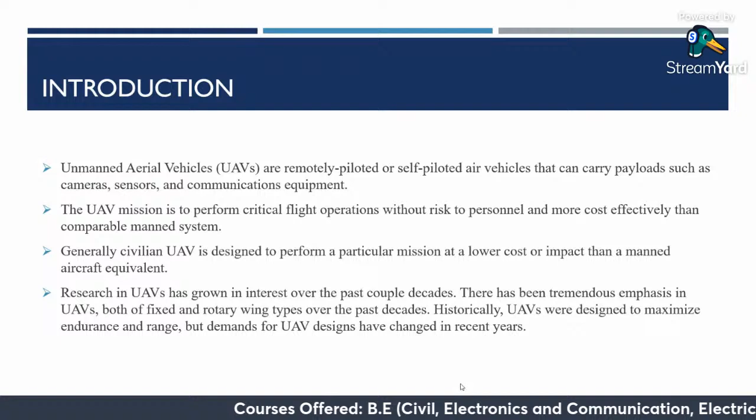Moving on, generally civilian UAVs are designed to perform a particular mission at a lower cost and provide higher impact compared to manned aircraft. In the recent past, trends show that research in UAVs has grown a lot, especially in the past couple of decades. Moreover, both fixed wing and rotary type UAVs have seen drastic improvements compared to the last 30-40 years.

Moving next, let us first get an idea about different types of unmanned aerial vehicles. In the top left corner we have the fixed wing UAVs, and next to it we have different types of multicopters.

Multicopters have different rotor crafts to help you fly in air, hover, or perform different maneuvers. Multicopters are classified into bicopters, tricopters, quad, hexa, and octocopter.

When we combine both fixed wing and multicopter, we get a hybrid VTOL UAV. Multicopters aid us by providing vertical takeoff and landing abilities, whereas fixed wing UAVs are well known for higher range and endurance. Endurance is, in simple terms, the amount of time which we can fly. Whereas in multicopters, the amount of flight time is very less.

But the disadvantage with fixed wing UAVs is that we either need to hand launch it, or it needs a runway to take off from the base or ground station. So when we combine multicopters and fixed wing UAVs, we get hybrid VTOL UAVs - the combination of multicopters and fixed wing, which offers vertical takeoff and landing. Once we take off, we switch to fixed wing mode, where the propulsion system for fixed wing turns on, and we can extrapolate huge endurance and range compared to multicopters.

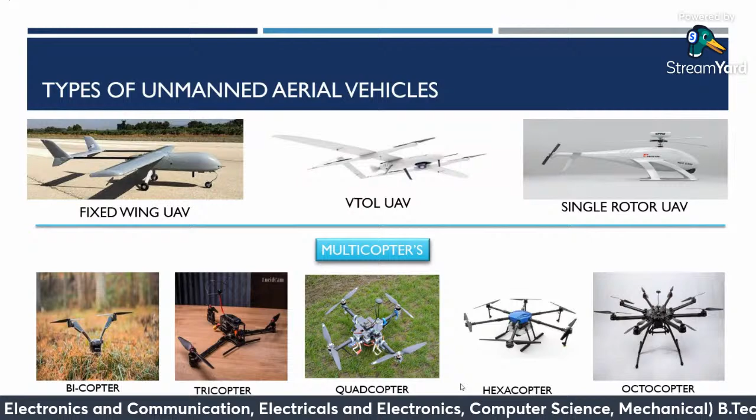Moving up next, let's learn deep about the fixed wing UAVs. Fixed wing UAVs can be used for flying as a hobbyist, or in various other applications. For example, here the UAV presented is the Skywalker UAV, which is hand launched. Generally, fixed wing UAVs use the wings to generate lift, and the geometry is designed with airfoils in an aerodynamic way that satisfies our needs.

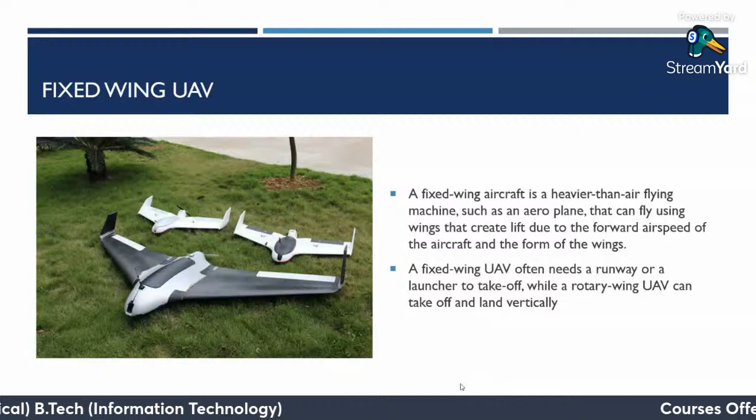About airfoils and the basics of flight physics, we'll be covering that in upcoming sessions. Next is the hybrid VTOL. As mentioned earlier, this category includes a wide range of aircraft, including helicopters, thrust vectoring fixed wing aircraft, and hybrid aircraft with powered rotors.

The major advantage, as I mentioned earlier - here we have a hybrid VTOL presented on the left side of the slide. You can see it is the H configuration with a propulsion motor at the rear part of the aircraft. Using the four motors present in the H configuration, we can take off. Once we reach a certain altitude, we transition to forward flight, where all four motors turn off and we can cruise efficiently towards our mission requirements.

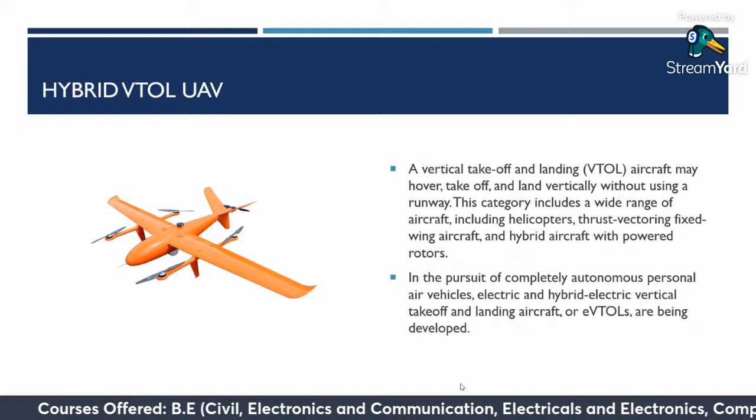As mentioned earlier, there have been huge developments in this particular range of UAVs. The extent of development is such that in very few years, we'll be able to use air ambulances or air taxis, which are already applicable in certain countries.

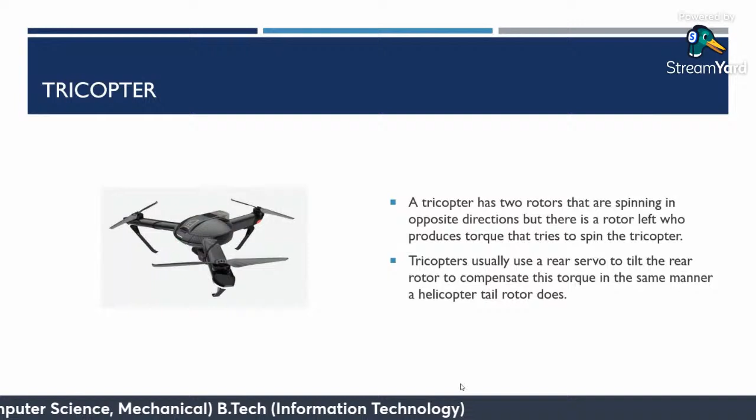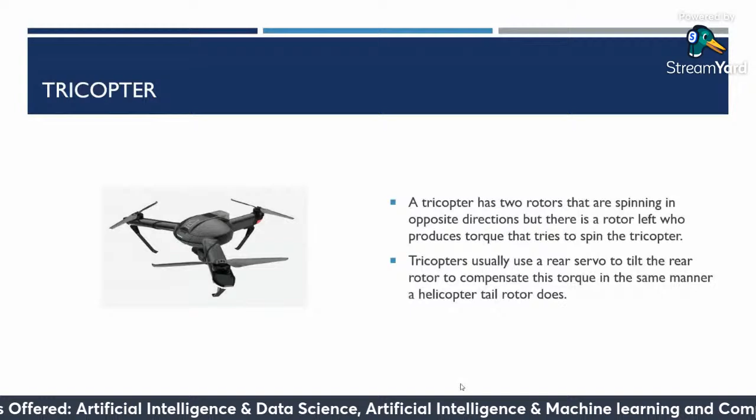Next, a tricopter. Generally, a tricopter consists of three motors - tri meaning three. To maneuver efficiently, it uses a servo in the rear rotor to compensate for torque, similar to helicopters. Even helicopters have a rotor in the rear part just to counter the torque created.

And then here comes the quadcopter, which you would have come across very frequently, and it is very good for hobbies to start off with. A quadcopter, sometimes known as a quadrotor, is a four-rotor aircraft. Despite the fact that quadrotor helicopters and convertiplanes had long been flown experimentally, the arrangement remained a mystery until the emergence of the contemporary UAV or drone.

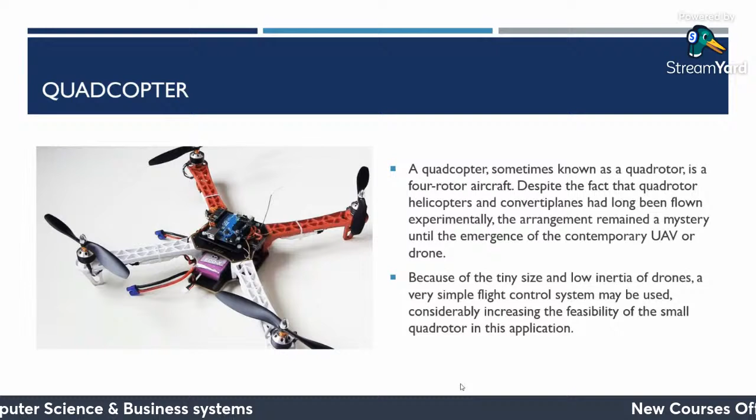In recent days, being practical, we have seen so many people getting into this field, not just as professionals, but with eagerness to learn about these things. It is a very good atmosphere being created. And because of the tiny size and low inertia of drones, a very simple flight control system may be used. As you can see in the picture, you can get an Arduino board, and also get a ready flight control program available on GitHub.

Just plug into the Arduino board, dump the code, and get the hardware system ready. You yourself can assemble a quad rotor drone and understand the dynamics, and also learn flying.

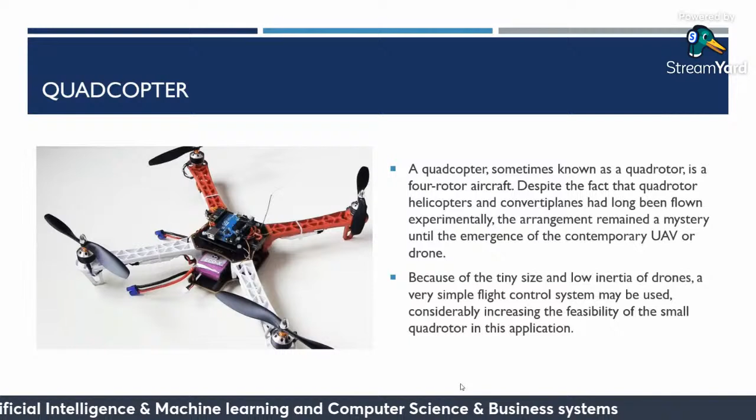Up next is the hexacopter. As the prefix mentions, it has 6 rotors. How are hexacopters different from quadcopters? They are strong, lightweight aircraft that can carry larger payloads compared to quadcopters because they're very steady in the air, making them ideal for aerial photography.

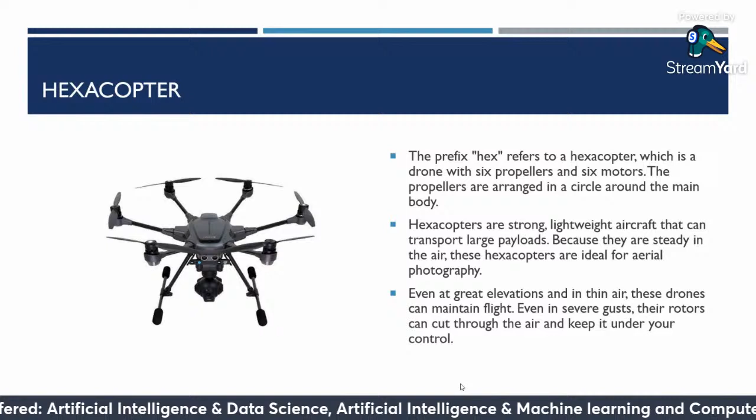There are many drones available in the market like DJI and Parrot drones, all using quad rotors. But one advantage of the hexacopter is that even if one motor fails, we could still get the system safely to land. Whereas if a motor fails in a quadcopter, it's a big hassle to bring the system back to land safely, and it might be catastrophic, causing us to lose a large amount of invested money.

Moving next, we have octocopters. Octocopters are basically UAVs that can fly in multiple directions simultaneously.

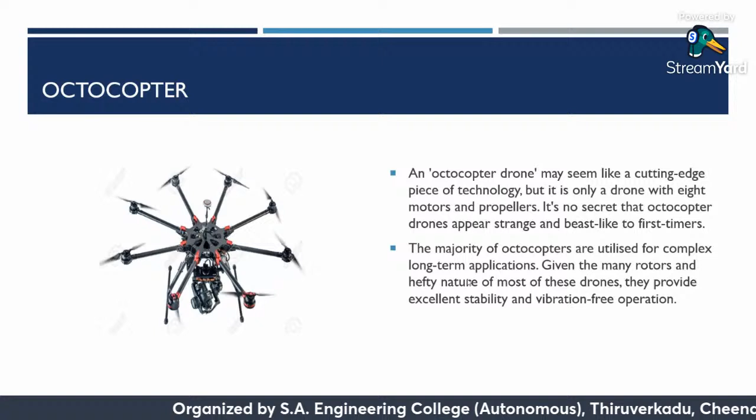Up next, we'll go through the classification of unmanned aerial vehicles based on UAV class, weight, and size. Adding to it, we'll also learn about operating altitude, range, and endurance.

First in the list is the micro class UAVs. The weight is nearly less than 0.55 lbs. Speaking about size, it's less than 10 centimeters, and their operating altitude is relatively low. Range is around 0.1 to 0.5 kilometers, which is like 100 to 500 meters. Speaking about endurance, it's much less than an hour, because the battery technology available till date is not sufficient to satisfy our needs for longer endurance.

Up next is Mini, which is around 0.55 to 2 lbs. Their size usually varies from 10 to 30 centimeters, and the operating altitude is less than 500 feet. Range is from 500 to 1000 meters, which is 0.5 to 1 kilometer, and their endurance is also restricted to less than an hour.

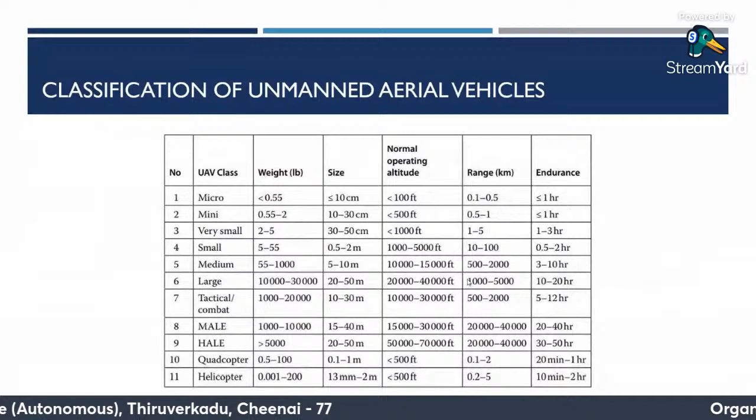Moving next is very small or nano UAVs. Their weight is generally limited to 2 to 5 lbs, and their size is around 30 to 50 centimeters. Their normal operating altitude is less than 1000 feet. Range usually extends from 1 to 5 kilometers, and compared to micro and mini UAVs, their endurance is a bit higher, ranging from 1 to 3 hours.

I'd like to share some information here: the DJI Mavic Mini comes under the class which weighs under 250 grams, so we don't need any registration from our side to the government. The reason is that this weight categorization is done for lawmakers to ensure and track the number of drones being operated in our country, as they may also be a threat to defense forces or civilians living nearby.

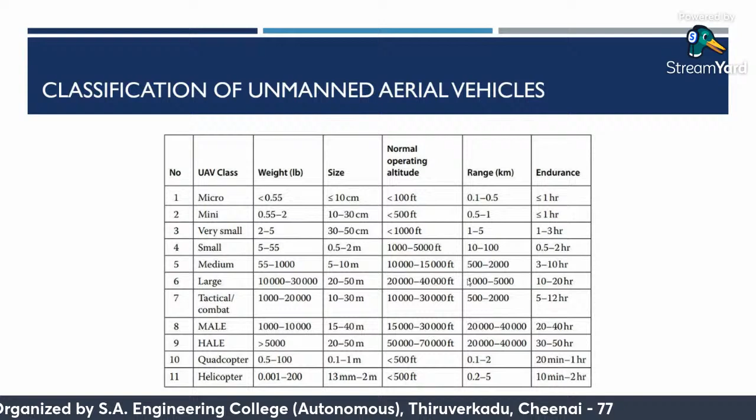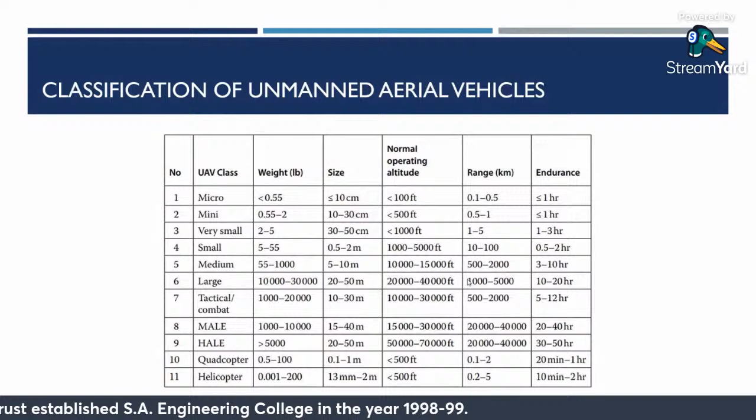Up next is the medium class UAVs. The weight generally ranges from 55 to 1000 lbs, and the size is from 5 to 10 meters. Speaking about operating altitude, it varies from 10,000 to 15,000 feet. And here comes a big difference compared to other classes of drones: their range is very high, from 500 to 2000 kilometers. The endurance is based upon the propulsion system used. With electrical propulsion, their endurance sometimes gets cut off significantly, whereas with IC-propelled or other propulsion systems, we can achieve high endurance, around 3 to 10 hours.

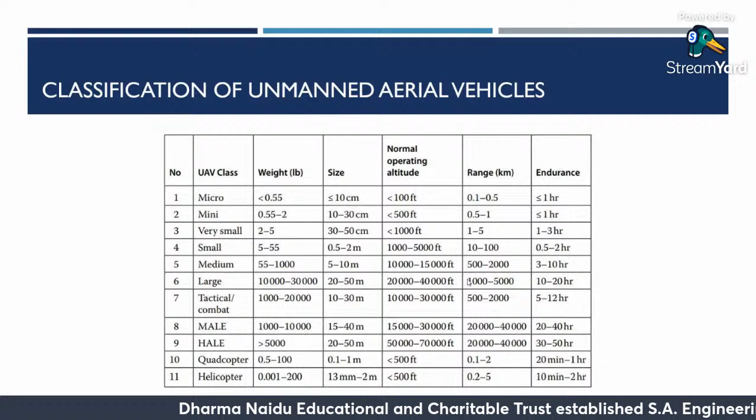Up next is the large class of UAVs, with a weight limit from 10,000 to 30,000 lbs, and size from 20 to 50 meters, as it sounds very huge. Their operating altitude is 20,000 to 40,000 feet, and the range varies from 1,000 to 5,000 kilometers. Speaking about endurance, these UAVs can be very useful in missions where we need to attack an opposition that's 2000 or 3000 kilometers away. To put it simply, in a war between two countries, they'll be using large scale or MALE class UAVs. We'll look into MALE class in the following slides.

And up next is tactical or combat. As I mentioned earlier, recently DRDO has tested a Swift UAV. It's nothing but a tactical or combat unmanned aerial vehicle. The job currently done by the pilot in a fighter aircraft will autonomously be carried out by the tactical or combat UAV with the help of a manned fighter jet.

Up next is MALE, also called medium altitude long endurance UAV. The weight is from 1000 to 10,000 lbs. The size usually varies from 15 to 40 meters, and the normal operating altitude is from 15,000 to 30,000 feet, and the range is from 20,000 to 40,000 kilometers. The endurance is very high, maximum at 40 hours.

HALE is nothing but high altitude long endurance UAVs. The weight is more than 5,000 lbs, and the size is from 20 to 50 meters. Normal operating altitude is 50,000 to 70,000 feet, and the range is similar to MALE class UAVs, but the endurance is very high. A HALE class UAV manufactured by a US based company has successfully flown from the United States of America to Australia, only because of the high cutting edge technologies they have. India is also looking to procure those drones for our defense forces.

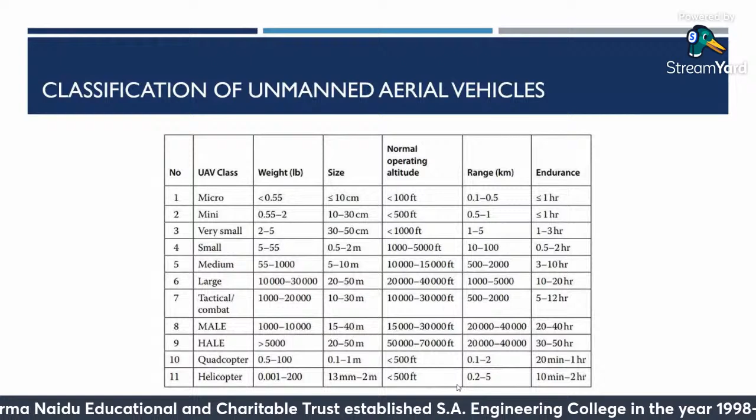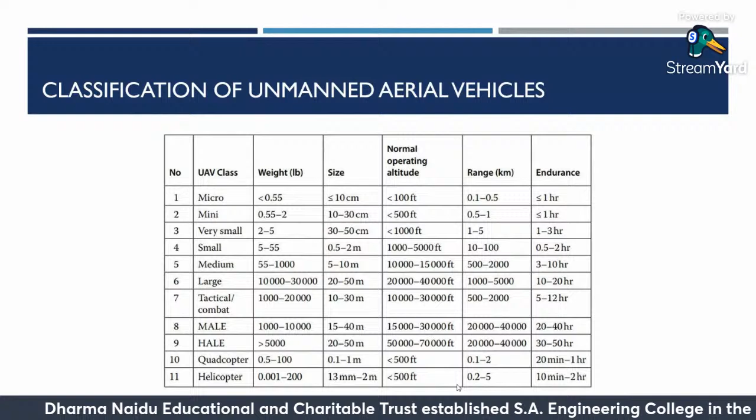Generally, their weight is at a maximum level of 200 lbs. Their size is from 1 to 2 meters, and their operating altitude is less than 500 feet. Endurance can vary, as I mentioned earlier. They're very aerodynamic and efficient compared to quadcopters, hexacopters, or octocopters, which ensures they provide an endurance of 10 minutes to 2 hours.

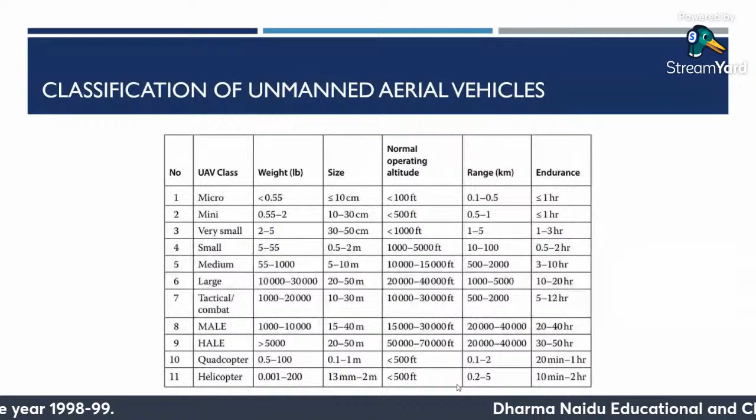Global Hawk is nothing but a high altitude, long endurance UAV. Its first flight was carried out on 28th of February 1998. The wingspan extends up to 39.9 meters—higher the wingspan, higher the lift you generate. The length of the fuselage is around 14.5 meters. Their maximum takeoff weight, as recorded, is 14,628 kg, around 14 tons. The range is up to 22,779 kilometers.

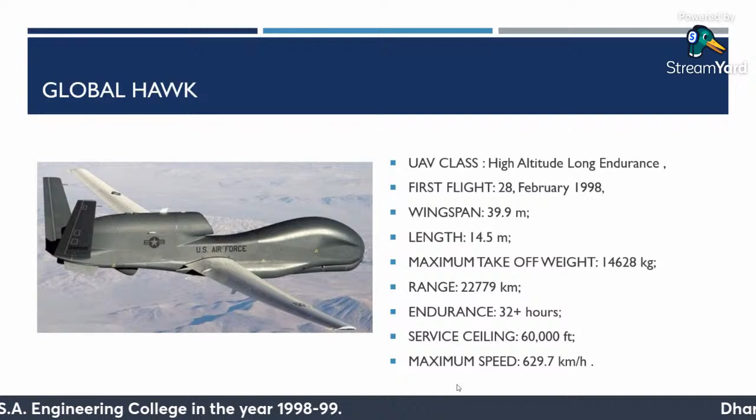As I mentioned earlier, Global Hawk is manufactured in the United States of America, which has successfully completed its flight from the US to Australia. Their endurance is more than 32 hours, and their service ceiling is 60,000 feet, and it can record a maximum speed of 630 kilometers per hour.

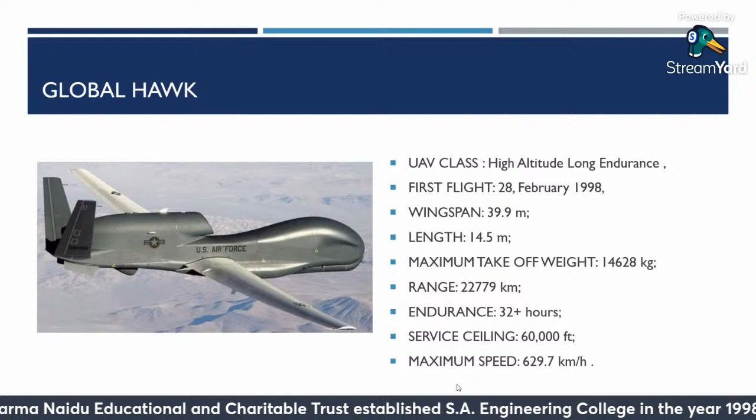Up next in our list is RQ-1A Predator. It is in our bucket list in the recent budget of our government. These UAVs belong to medium altitude, long endurance aircraft. Its first flight was carried out in June 1994. The wingspan extends up to 20 meters, and the length of fuselage is 11 meters.

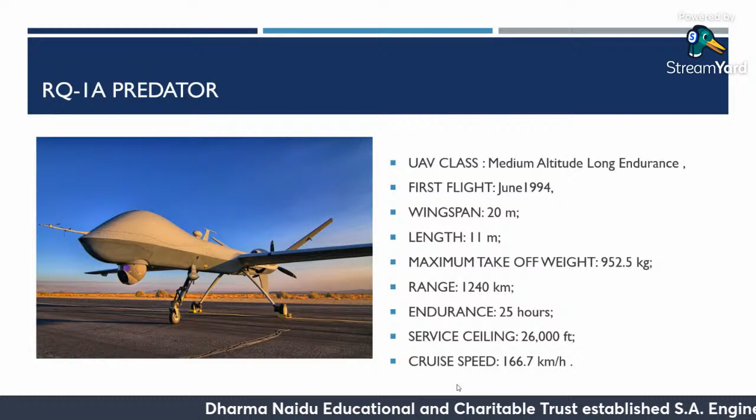MTOW is something which includes the fuel it carries, the avionics, the payload, and the structural weight itself. The maximum takeoff weight here is 952.5 kg. You could now know the difference between the HALE class maximum takeoff weight and the MALE class MTOW. The range is 1,240 kilometers. Speaking about the endurance, it's lesser than HALE class, just 25 hours. The service ceiling is also very low compared to HALE class, just 26,000 feet. The cruise speed is recorded around 166 to 170 kilometers approximately.

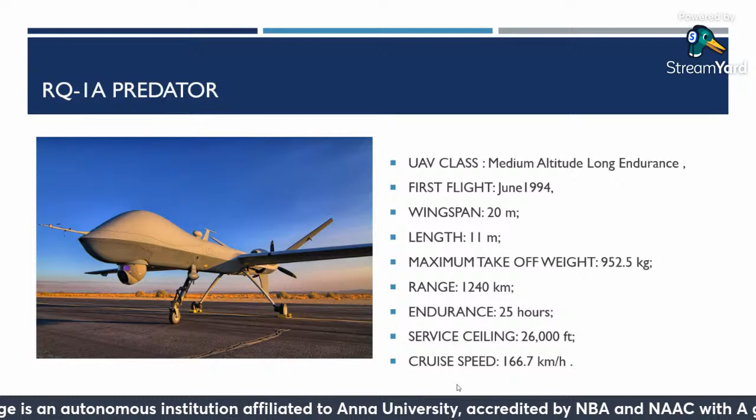Up next is small class UAV. Bayraktar is a very famous name as of now because it has been very widely used by Ukraine in the Russia-Ukraine war. Bayraktar is a small class UAV, and the wingspan is around 1.6 meters. The length of the fuselage is 1.2 meters, and the MTOW is very low, around 3.5 kg. Endurance is greater than 60 minutes as it uses an electric propulsion system and has an aerodynamic body. Service ceiling is just 300 meters and its cruise speed is recorded at 70 kilometers per hour.

Up next is Mosquito UAV.

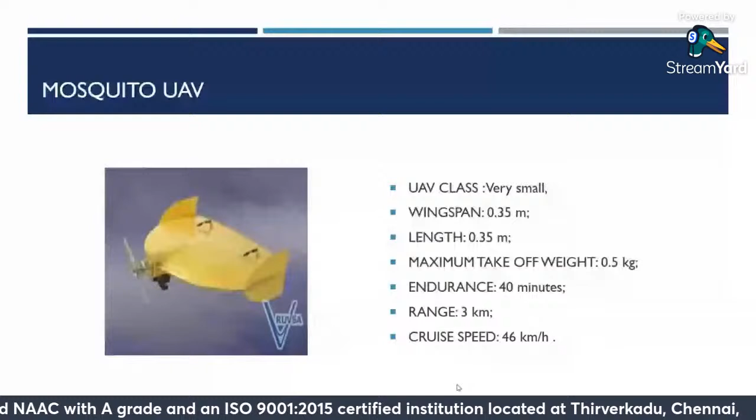The name might be very funny, but these UAVs have limited applications. This UAV belongs to a very small class, with a wingspan around 0.35 meters and length of 0.35 meters, around 350 mm. The MTOW of this UAV is 0.5 kg, and it provides an amazing endurance of 40 minutes, even though propelled by an electric propulsion system. The range is around 3 kilometers and its cruise speed is 46 kilometers per hour.

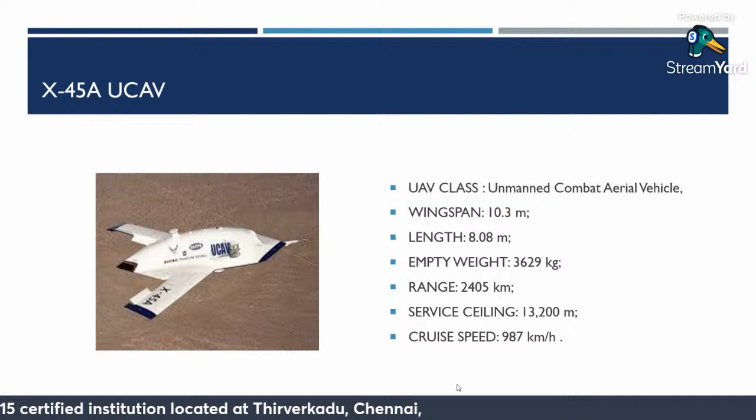This is one of the most exciting UAVs which fascinates me a lot when it comes to modern developments. This unmanned combat aerial vehicle, named X-45A, is developed by Boeing, with a wingspan of nearly 10.3 meters, which is really huge, and its length is around 8.08 meters. Its empty weight is around 3,629 kg. The range is 2,405 kilometers. The recorded service ceiling is 13,200 meters, just to ensure it is not detected by the enemy's radar. The cruise speed is around 987 kilometers per hour, which is really tremendous, and it's powered by turbojets.

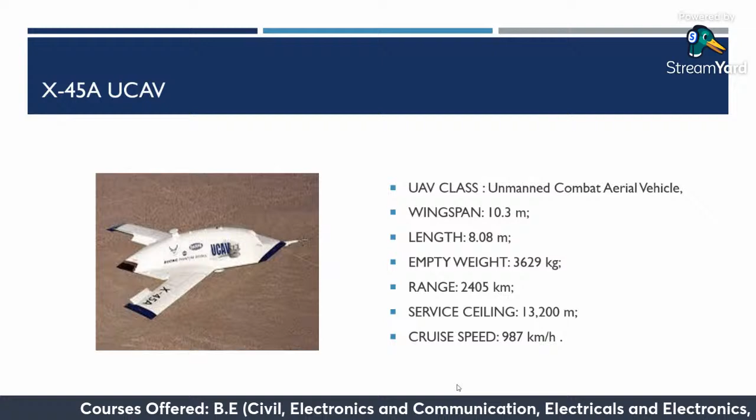These UAVs are designed in such a way that they are pretty much tailless, and they also satisfy the stealth requirements. Stealth requirements in the sense that it shouldn't be detected by the enemy radar when they send the signal off. You could see the profile is very much sharp in the edges. This is because whichever radar signal is dissipated from the ground should be reflected outwards and not towards the radar station. This ensures that the UCAV remains undetected by the enemy's radar, and it can carry forward the prescribed mission.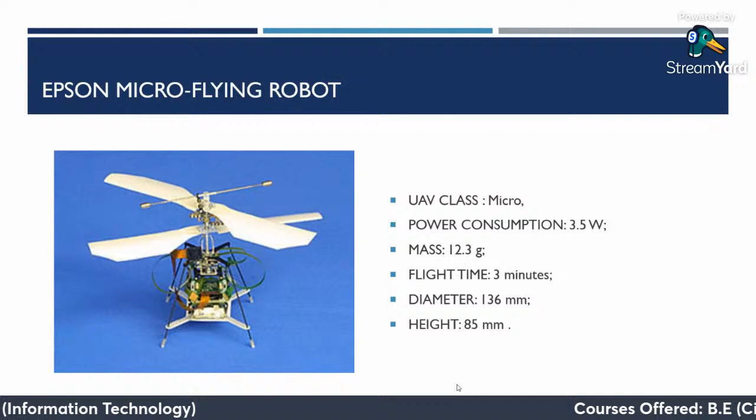We could have also come across a recent success of NASA flying a similar class of UAV on Mars, just to gather some data and proceed on with future developments.

Before diving in further deep, let's understand the motions of an aircraft. The picture on the left denotes the different axes and the motions you can do. The z-axis is generally prescribed for yaw, the y-axis is for pitch, and the x-axis is for roll. The video here will give you an idea about the roll axis, pitch, and yaw axis.

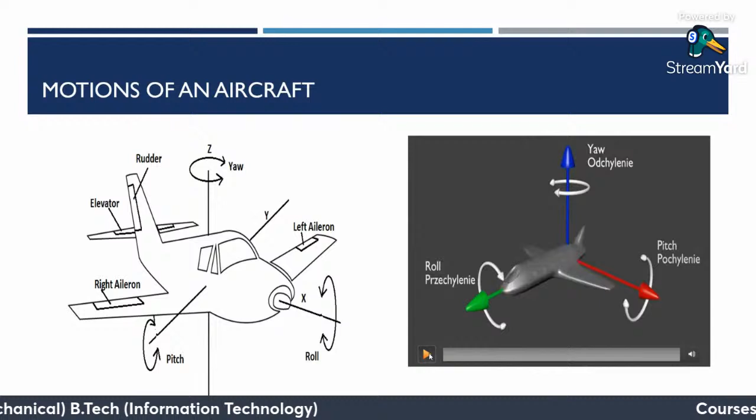Here the pitching is happening, and you could also see that in the pitch axis, it is majorly determined by your elevators, the roll is determined by your ailerons, and yaw is done with your rudders.

Here, as I told you earlier, we learn about the airfoil nomenclature. An airfoil is nothing but the aerodynamic geometry used in manufacturing wings, and it is also a major part in creating a proper amount of lift for our aircrafts. In this geometry, we have a leading edge radius based on which the complete airfoil is designed. The forward section of the airfoil is named the leading edge, and the rear is the trailing edge. The length of the airfoil from the leading to trailing edge is known as the airfoil chord.

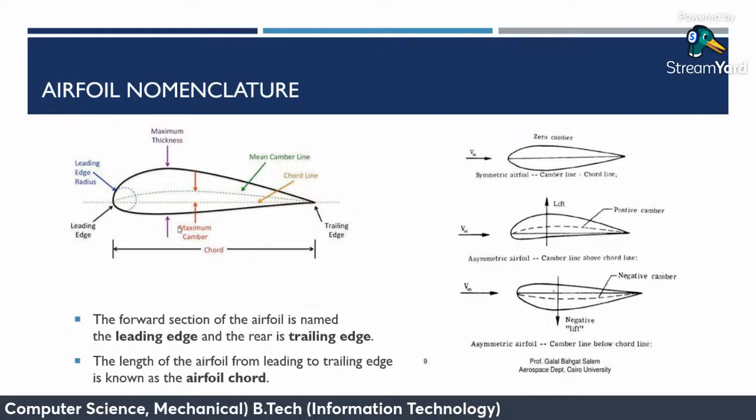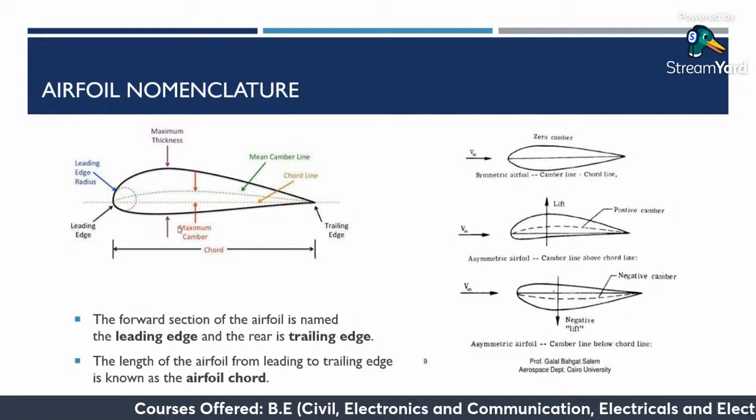On the right side of the slide, you could see different types of airfoils. The first is a symmetric airfoil where there is zero camber, meaning the line joining the leading edge and trailing edge is very straight without any deviations. The next picture is the asymmetric or cambered airfoil, where there is a very little amount of curvature in the bottom, also called positive camber. The third picture has a negative camber because the camber line is below the chord line. So these are the very basic differentiations of airfoils, and you have also learned about the airfoil nomenclature here.

Up next is the physics of a fixed wing UAV when it is not either climbing or banking, which is why it is named steady level flight. The image here shows the different components acting on an aircraft. Lift is opposite to the self weight, and thrust is just parallel to drag. On resolving the components, lift is equivalent to the weight and drag is equivalent to the thrust.

The formula for lift is nothing but half into density into velocity squared of the free stream air, into the wing surface area, into the lift coefficient.

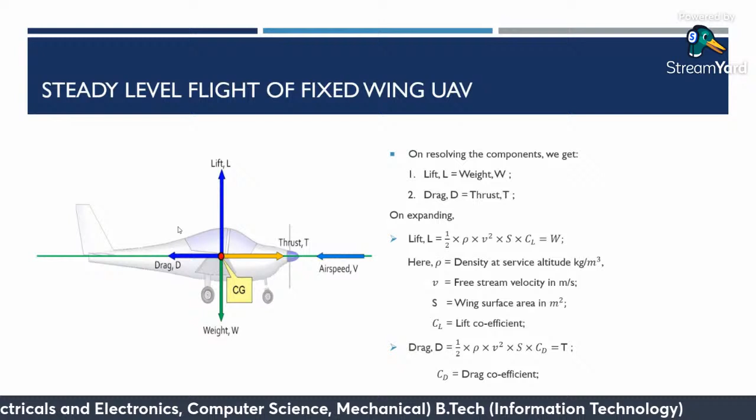Lift coefficient is nothing but a constant which signifies the amount of lift a particular airfoil can generate. This lift is equivalent to the weight, which simply means that the wings must be able to generate an amount of lift equivalent to the weight of the total aircraft.

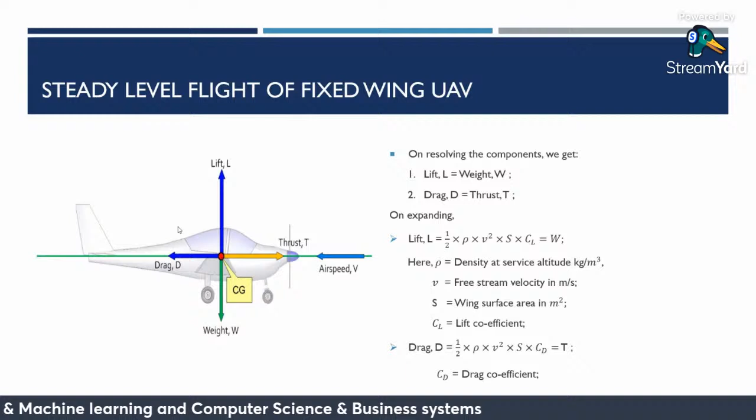Up next is the drag. When choosing a propulsion system, we should keep in mind that we should overcome the drag produced by the velocity passing through our system. So here the drag equation becomes equivalent to the thrust.

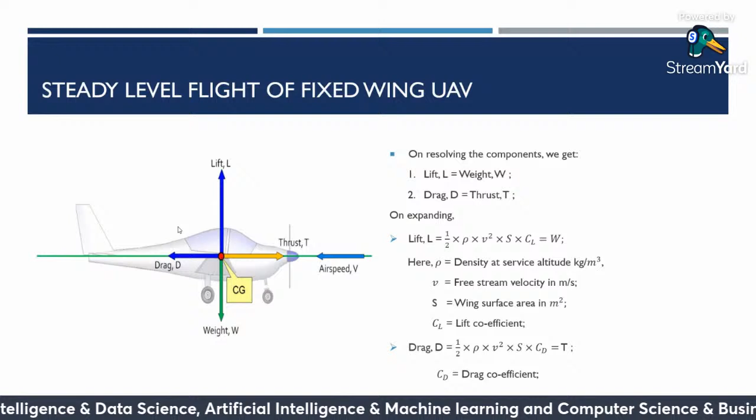The drag equation is pretty much similar to the lift equation. The only thing which varies here is the coefficient. In the lift equation we use the lift coefficient, whereas for drag we use CD, which is nothing but the drag coefficient.

Up next is the physics behind multicopters. Multicopters are a very exciting concept for me. Let's have a small activity here.

This literally means each motor must produce an equal amount of thrust to attain steady flight or hover. Thus, thrust equals total mass divided by number of motors. Our total mass here is around 2 kgs, divided by the total number of motors, which is 4, giving us a thrust of 0.5 kgs.

So while sizing our propulsion system, we should ensure that we procure a motor which can produce thrust of at least 0.5 kgs, or 500 grams. While hovering, the thrust to weight ratio is said to be 1.

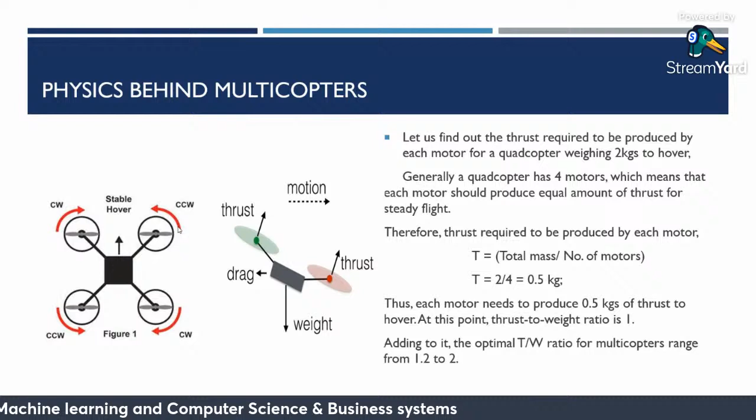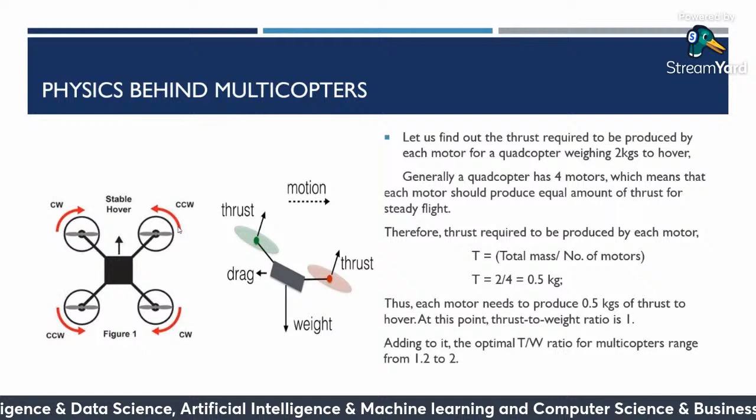Adding to it, generally our application while using multicopters is not just to hover but also to proceed with certain applications. To maneuver accordingly, we need a thrust to weight ratio of 1.2 to 2. So at that time, we might need thrust levels of 1 kg to be produced by each motor to attain a thrust to weight ratio of 2.

And here we come to the design part. If you want to be a UAV designer, you will have to follow the following 10 parameters before starting the design. Number one is your production cost.

Whenever you get into a project, the first thing you'll have to estimate is the amount which you'll have to get from the funding agency or the person who's funding you.

Up next is performance. Performance of a passenger aircraft and a fighter aircraft is completely different, so this is where we'll have to seal our opinion and move further.

Up next is flying qualities. As mentioned earlier, a passenger aircraft won't be performing high maneuvers. Its application is just to transport passengers from one state or country to another place. Here the major thing is to ensure the comfort of the passengers.

Whereas in a fighter aircraft, it is completely different—there is nothing to do with the pilot's comfort. In recent times, you might have come across the Top Gun movie where you could have learnt about 10 Gs of load acting on an aircraft. It's very hard to take up that load, and this is why fighter jet pilots are highly ranked wherever they go.

Up next is the design period. Not just in designing a UAV, any project we take up must fall within a constrained time period, within which we'll have to plan our activities and perform manufacturing.

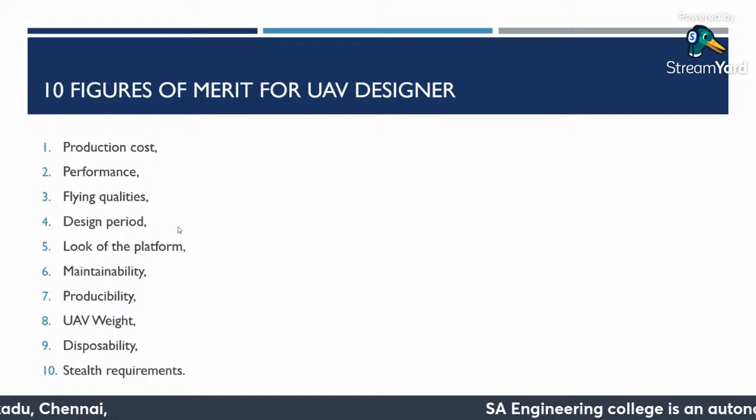Up next is stealth requirements. Stealth requirements does not imply for every aircraft we design; it's based on the design requirements. Like for unmanned combat aerial vehicles, we need stealth requirements just to avoid radar detection. Again, while designing stealth aircraft, there are different design parameters which we should contain and look onto.

Up next is the UAV life cycle. Like any product, UAV has a general life cycle, starting off with conceptual or preliminary design, moving on into detailed design and development, where we'll work on computer design, high fidelity analysis using computational fluid dynamic software, static structural analysis, and again getting into conceptual and preliminary stage, where we'll be optimizing our design again and again.

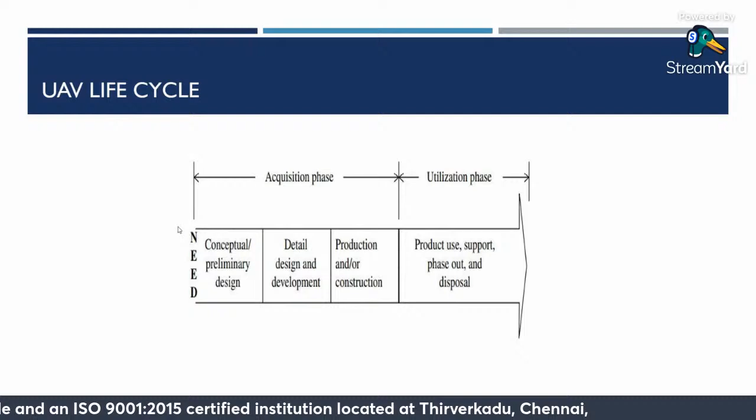Up next is our production stage. Production is the very end stage, but before that we would have gone through so many iterations just to satisfy our design requirements or the requirements provided by our customers. All these three stages, starting from conceptual, moving to detail, and at last the production stage, is called the acquisition phase. And at last, it is the utilization phase.

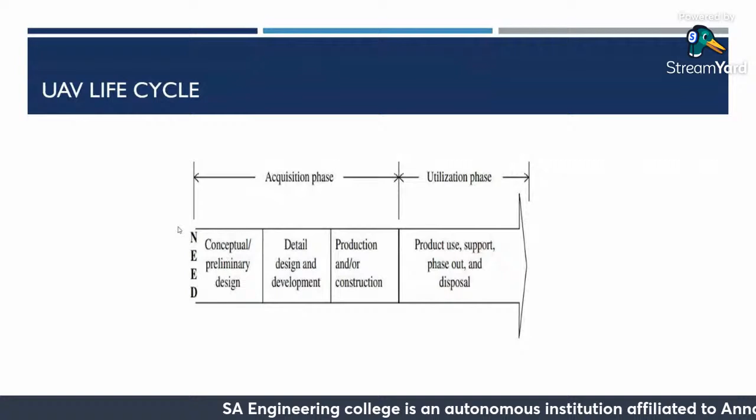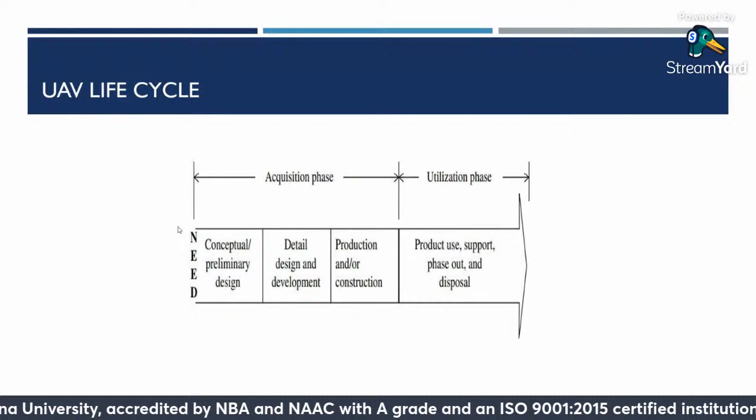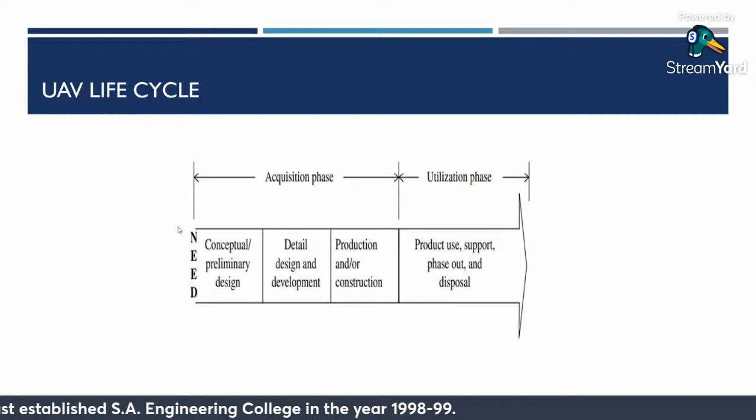Once we produce our UAV, we'll introduce it to our market, where it will be drastically used, and we'll have to give support in terms of maintenance, technical malfunctions, or anything. Up next is the phase out and disposal. When it comes to disposal, again I'd like to stress a lot on this. Disposal stage is very important. We should also look into recycling certain parts and also dispose of it safely without any hazard to nature.

In the conceptual stage, what will we do? We'll start off with the UAV design requirements. These design requirements include the mission, performance requirements, stability of the system, controls, cost, operational time, the time required to manufacture it, and the payload.

Payload is a very important thing here. For an aerial photography drone, the camera itself is a payload, whereas for an air ambulance, the medical stuff it carries is a payload.

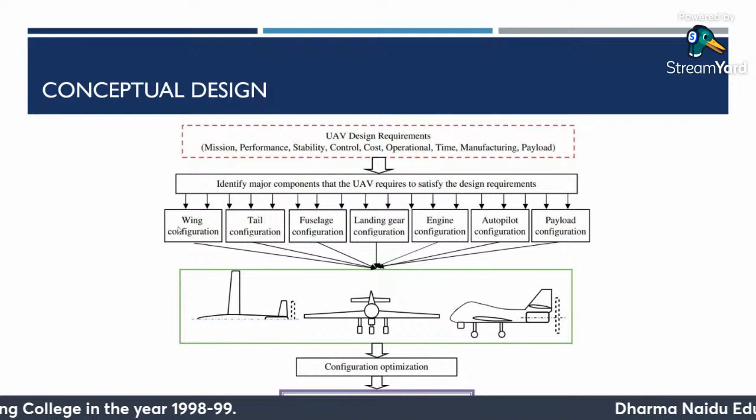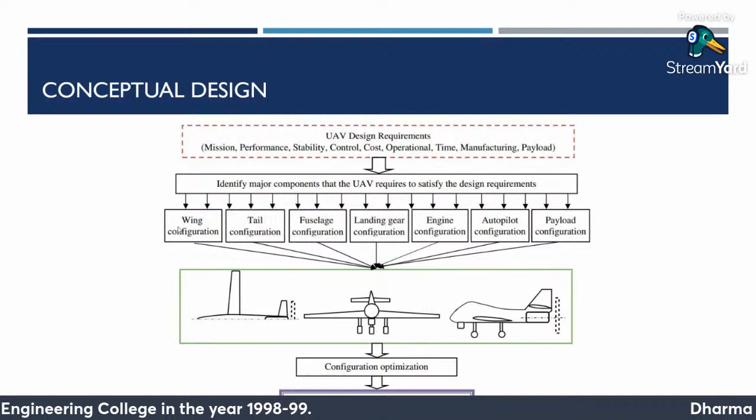Once we are done with the design requirements, we'll identify major components of the UAV in such a way that it satisfies our design requirements. Certain parameters are the wing configuration, tail configuration, fuselage configuration, landing gear, engine, autopilot, and payload configuration. Once we are done with that, here comes our engineering graphic skills.

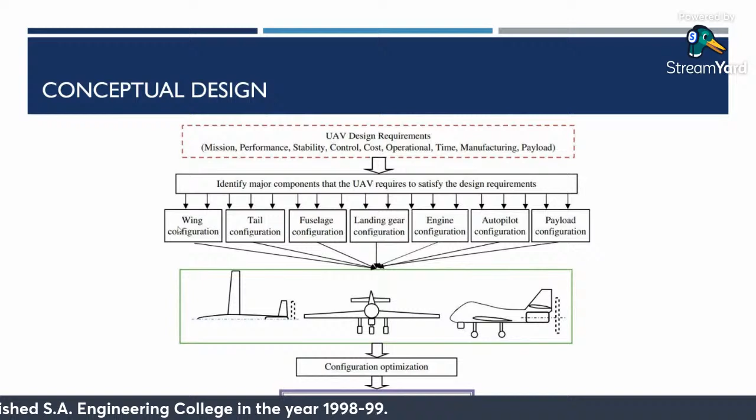We'll start doing our conceptual design. It must be creative to get different layouts ready. Once that's done, we'll do trade-off analysis, where we'll get an optimized configuration. Once we get certain optimized configurations, we'll finalize our UAV configuration, which is the final one. Once the configuration is selected, we'll move on to the preliminary stage.

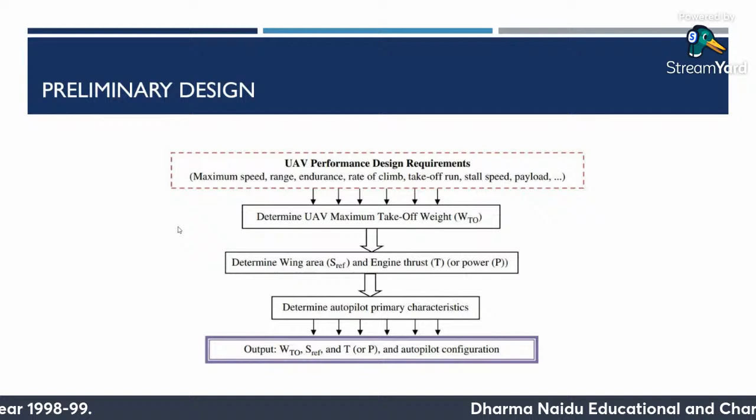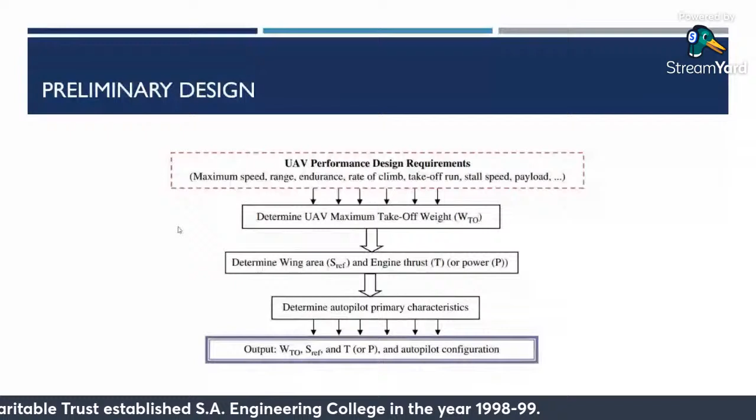After that, we'll again be determining the maximum takeoff weight of a UAV using certain formulas, and once that's done, we'll move on to the wing area. As I mentioned earlier, in steady flight, lift equals weight. The wing must have sufficient area to generate enough lift to carry the self weight of the total UAV.

Moving next, we'll be choosing the engine based on the overall weight of our aircraft. The engine selection can be either propelled by IC or jet. Moving on to electric propulsion, we'll be calculating our power required.

Up next is the determination of autopilots. There are a wide range of autopilots available in the market, starting from Ardupilot, Pixhawk, and Micropilot. There are so many, and certain things can also be self-developed. Most organizations just procure an autopilot and make minor changes to it, adopting it for their own applications.

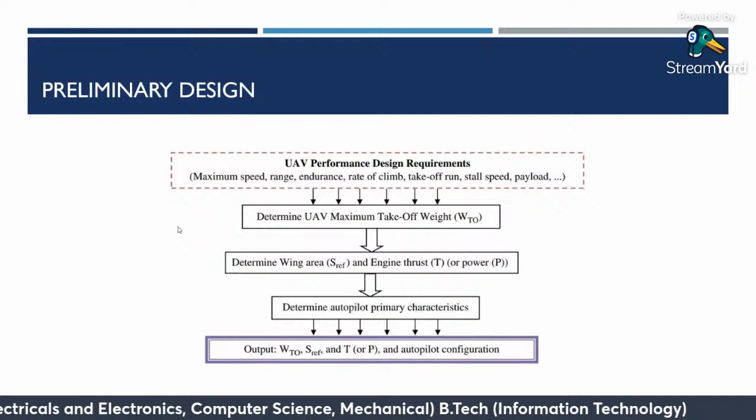This is where we'll be showing them the maximum speed it can travel at, the range and endurance it could provide, and many other technical details. If it satisfies their needs, they'll be funding us or procuring our products.

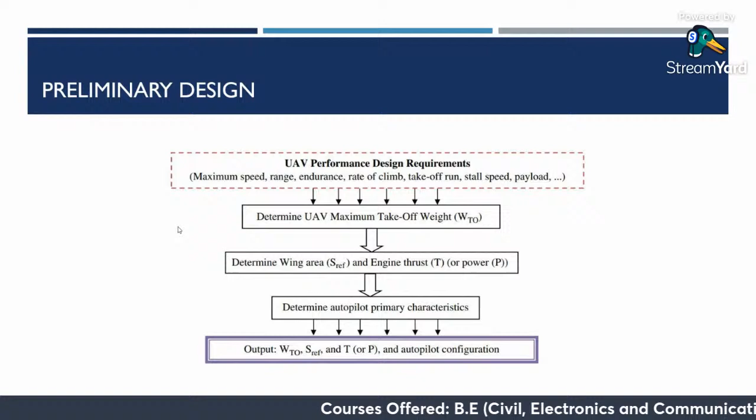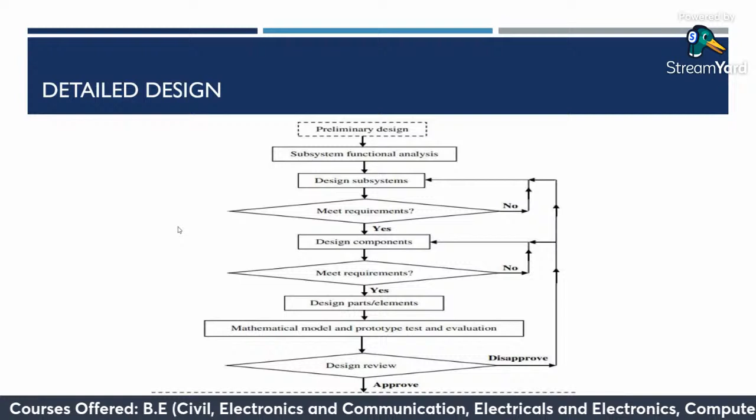Next is our detailed design phase. Here, slowly our UAV will start getting into shape. From the preliminary design, we'll move into subsystem functional analysis, which includes our avionics, and any mechanism we use will also be validated. Then we'll optimize the design, and if it's meeting our requirements, we'll proceed further onto component design. If it's not satisfying our requirements, we'll iterate it again.

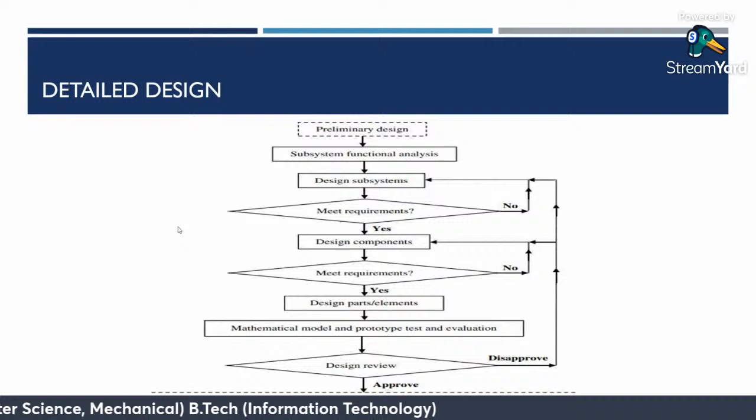Once that's done, we'll be designing parts like our wing, control surfaces, tail, rudder and elevator and stuff like this. Then we'll create a mathematical model and manufacture a prototype. Once the prototype has been manufactured, we'll test it in real time just to ensure its airworthiness and structural integrity.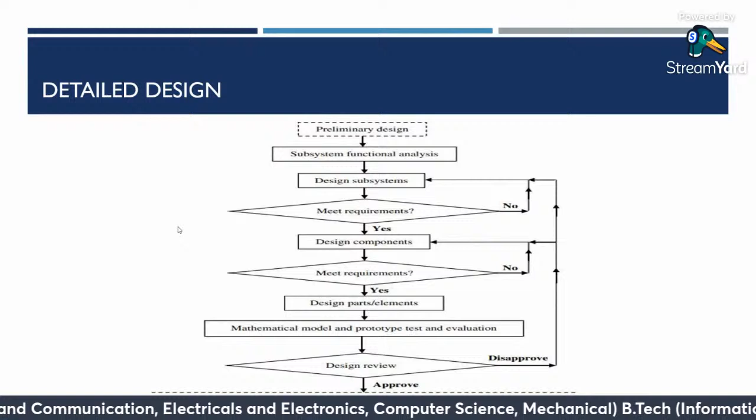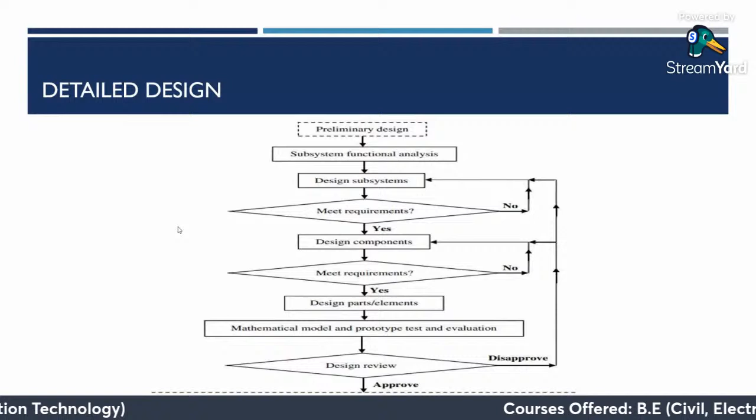Moving on, next is the design review. Once we perform prototype testing, we'll understand how the flight is behaving in the air. If we are satisfied with the performance, we'll move on to documentation work. If it's not performing well, we'll iterate the complete detailed design phase from the start. If at last we have our performance satisfied, we'll move on to release of documentation such as detailed drawings and everything for large scale production and assembly.

Till now we have been learning about what UAVs are, how they work, and the different types of them. Now let us start looking at the application of UAVs. The drone application ranges from entertainment, aerial photography, delivery, geographic mapping, disaster management, precision agriculture, search and rescue, weather forecast, law enforcement, and wildlife monitoring.

Speaking about law enforcement, in the recent days when we faced COVID, drones were used to detect people on the streets, and it helped in forcing people to get back into their places. As for aerial photography, everyone who's traveling around the country or on a vacation doesn't need a separate cameraman behind them, they just need a capable UAV that will get them very beautiful photos.

It also extends to precision agriculture, an interdisciplinary concept where they use unmanned vehicles in combination with machine learning algorithms. Let's say we have a strawberry farm and the harvest time is around 6 months. They'll fly the drone above the farm and analyze the health of the crops. For example, at the end of 2 months, once we fly our UAV, we'll get a forecast about the amount of harvest, the health of each and every fruit, and the level of water precipitation in the soil. Based on that, we can either spray fertilizer or pesticides, and proceed with water supplements.

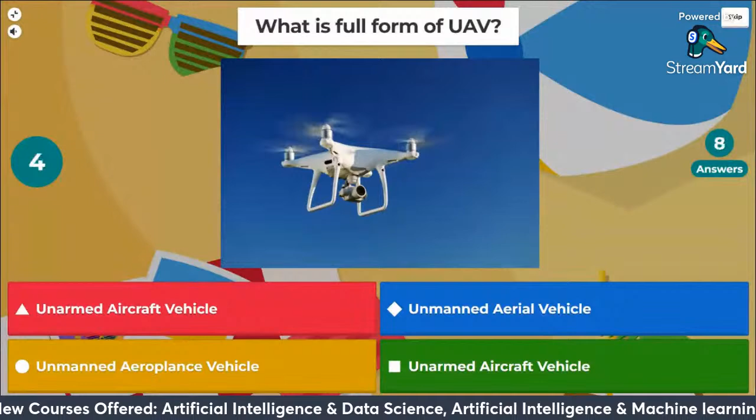We have 17 seconds left. Let's see who answers it. We already have 6 of them answered right. Let us see how much time it takes for the others. Oh, we have all the 7.

The right answer is unmanned aerial vehicle, and about 9 of them answered it right. I'm sorry about that. So we have Praveen on top with a score of 948, followed by Maha and Vidit.

The second question is: which of the following category of drones does not require registration for use in India? The options are nano category, micro category, small category, large category.

Three of them have already answered it. 20 seconds left, 18 to go. Let us see how many of them answer within the time. Okay, we have 10 seconds left now.

And the answer is nano category. So let us see who is on top. Okay, Praveen remains on top, followed by Nitu and Sasikala.

That's great. Moving on to the third question: Which of the following is not a type of drone based on aerial platform used? The options are multi-rotor drones, single-rotor drones, moving-rotor drones, fixed-wing hybrid VTOL.

So your answers are... 15 seconds left. And the answer is moving rotor drone. So let us see who is on top this time. Wow, it's Praveen on top, and Bablu has come up in the scoreboard, followed by Nitu and Kesh.

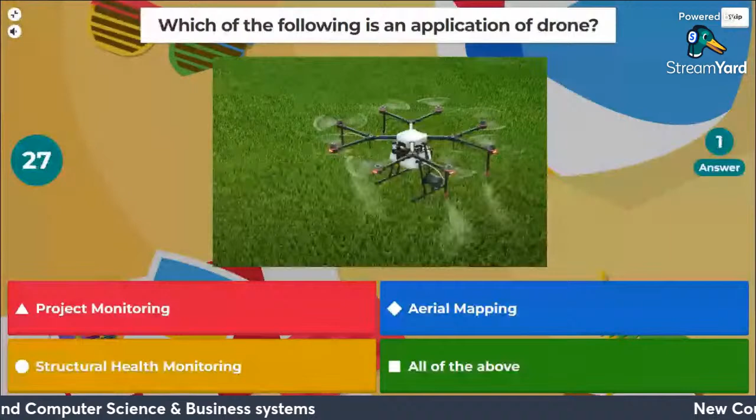So which of the following is an application of drone? Project monitoring, aerial mapping, structural health monitoring, all of the above. This answer must be pretty clear to you guys, and I'm hoping all of them answer right.

So all 10 have answered it. Let us skip it. The answer is all of the above, that's great, as I thought. So Nitu has come up with a score of 4674, and Pravin with a score of 3758, followed by Sasikala, who has remained in place.

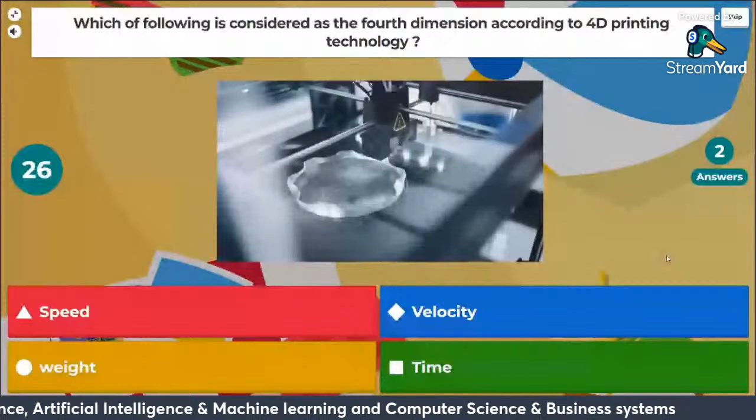That's great. So the next question is, which of the following is considered as the fourth dimension according to 4D printing technology? Speed, velocity, weight, time. This is again an easy question, I guess.

Let us see how many of them answer it right. We have 15 seconds left. All 10 have answered it. That's great. Moving on, the answer is time, and 6 of them have answered it right. Nitu stays on top, followed by Pravin, Vidit, Kesh, and Bablu have made it to the scoreboard.

So the next question is, which is the predecessor technology to 4D printing technology? The options are offset litho printing, 3D printing technology, flexographic printing, digital printing. We have 15 seconds left, and already 6 of them have answered it. I'm hoping maybe it's an easy question again.

Wow, that's great, all 10 have answered it. Moving on, the answer is 3D printing technology, and 5 of them have answered it wrong - it's a 50-50 ratio. Nitu has been staying on top with a score of 6611, followed by Vidit and Partha, by Sasikala and Praveen.

Moving on to this third last question: Simulation software developed by Autodesk for 4D printing technology. Cyborg, AutoCAD, Fusion 360, Catia. So the answer is, we have 15 seconds left, and already 6 of them have answered it.